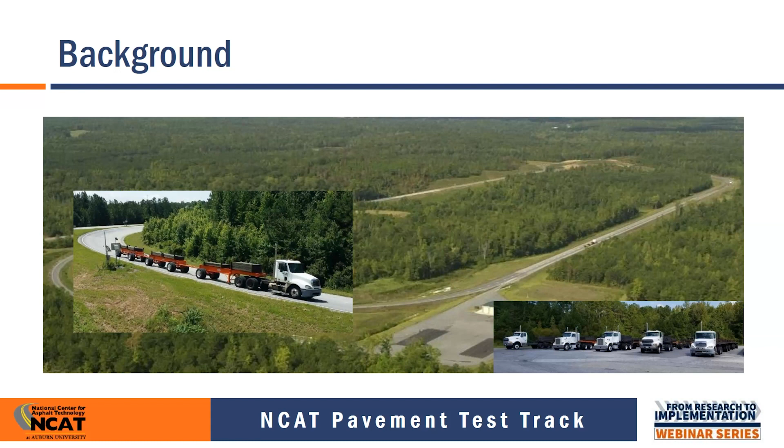We run 5 trucks at a time to do this. What this means is that when we're optimally productive, we want to do 100,000 ESALs per week, or 20,000 ESALs per work day, and then we shut down 1 day a week so we can go out on the track and do detailed pavement condition assessments.

With respect to today's topic, I wanted to go through the history of the track and pull out some very specific information before I hand it off to Ben. Today's format is going to be a little different because I'm going to go through the background and then step off into the research and cover the very first part of that, and then hand off to Ben.

When we finished the first track, it was almost exclusively virgin mixes all the way around. All 46 of the original 200-foot test sections were all but just a couple - there were a couple of low RAP mixes, but everything else was hot, virtually everything was virgin.

In the first rebuild in 2003, we had some low RAP mixes in mill and inlays, and we did our first warm mix asphalt - some of the first warm mix asphalt in the United States, in fact, was on that 2003 track.

In 2006, we did our first mixes I would classify as high RAP. They were 45% RAP, mill and inlay test sections in the curves - the west curve and the east curve. That project was very successful.

From there, in 2009, as part of a bigger structural experiment, we did full depth high RAP test sections where we had 3 layers - the base layer, the binder layer, and the surface layer - all 50% RAP. In 2006 and 2009, we fractionated our RAP in order to hit our quality targets with those mixes.

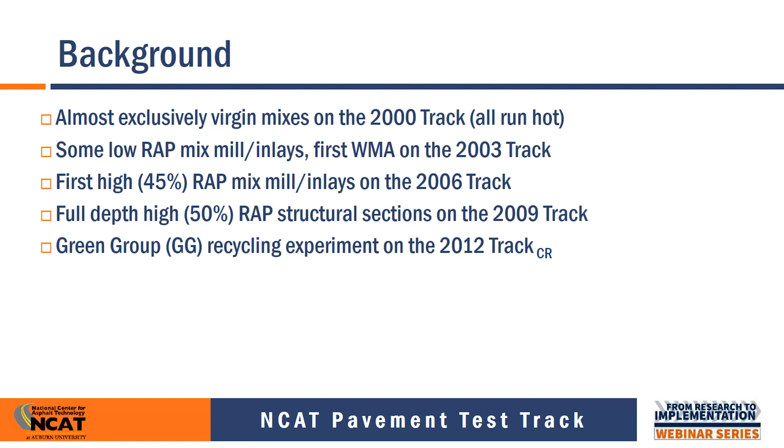I've got that little CR abbreviation there to remind me that in 2012, that was when we did our first 100% RAP cold recycle mix, which Ben is going to talk about quite a bit when I hand off to him. In 2015 and 2018, we executed what we call the cracking group experiment. By the way, in each of these research cycles there were a lot of other things we studied - I'm just referring to what's relevant for today's topic.

Also in 2015, I've got CR in orange there to remind me to tell y'all that we ran cold recycle mix in our hot plant with the burner off after it had been allowed to cool down overnight. So that was another round of cold recycle mix that we did there.

In 2021, the centerpiece of that study was the additive group experiment. In the cracking group study, we got a lot of confidence in the ability of balanced mix design cracking index tests to match the performances we observed on the track. So we moved that forward into the additive group. The purpose there is to look at recycled ground tire rubber and recycled plastic in both wet and dry packages, and also high strength aramid fibers, compared to a control mix. So we understood the cracking test from 2015 and 2018, and then moved that forward to better our understanding of the impact of additives on the life of the pavements.

As you can see here, we've got a history of going from virgin mixes to low RAP mixes to high RAP mixes, in hot mix and warm mix, and then to cold recycle. We've even done coarse fractionated RAP chip seals now several times on the track. I've got fine fractionated RAP microsurface shown there in orange, to remind me to tell you we've not done that yet on the track, but it's not because we haven't wanted to try it. It's just because we haven't gotten the chance to do it yet in a funded experiment.

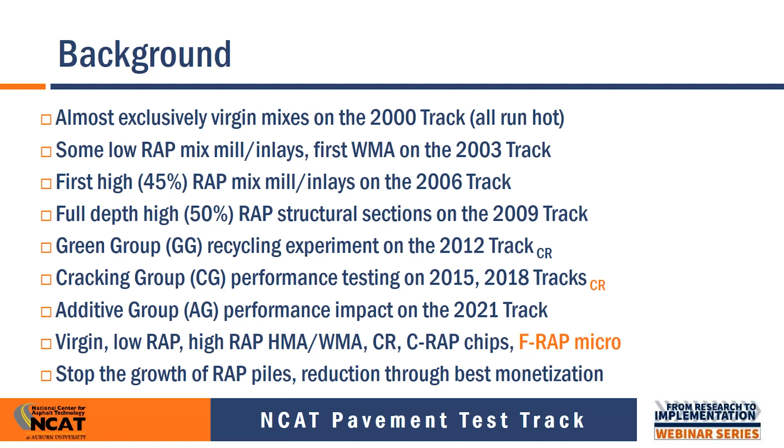The whole point of this webinar, as part of the background, is that what we really want to do is stop the growth of especially the giant RAP piles in some of the urban areas. And then we want to begin to make them smaller through the best monetization of the RAP that is in those existing large RAP piles. Hopefully by the end of the hour, you'll have a good feel for what our philosophy is on that.

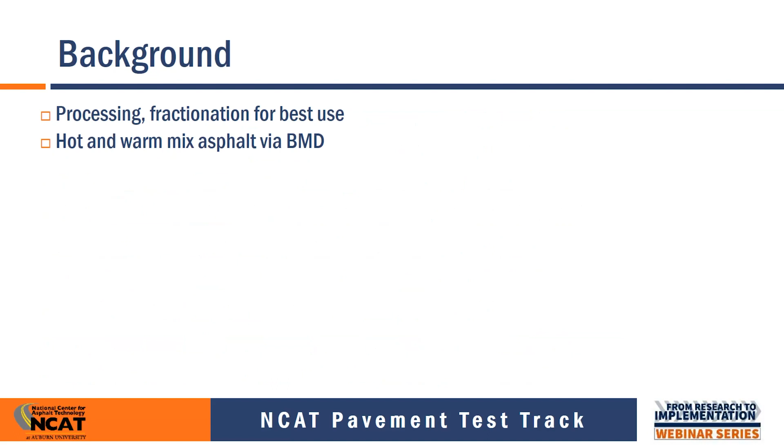So of course we believe processing and fractionation is essential if you really want to get the best use of the material, and I think you'll see that theme throughout the webinar today. You can run hot and warm mix asphalt using RAP when you use balanced mix design practices.

When you're running BMD tests, really simple BMD tests with this type of machine, you load these samples in indirect tension. When you run the sample at some elevated temperature, run it hot, the peak value gives you a strength indication that we believe correlates well to a loaded wheel tester. And then when you run it cool at laboratory temperatures, the shape of the curve correlates well with the cracking that we've observed on the track.

So you use these tools to design virgin mixes, and volumetrics served us well for a long time with virgin mixes. Nathan Moore and I talk about this all the time - volumetrics are a great tool for developing mix designs, but they have less value for actually policing mix designs.

But when you get into low RAP mixes and especially high RAP mixes, you need to use best practices on your yard to do processing and fractionation, and you really need to respect RAP piles more than virgin piles in terms of your quality program on your yard if you want to run higher RAP contents. And when you're running high RAP, that's when you might want to consider additives like recycling agents for short-term and long-term aging, that type of thing.

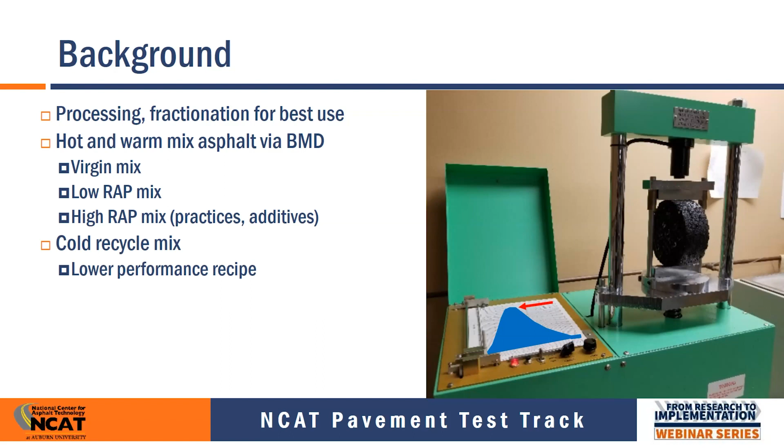Cold recycle mix is another great use for reclaimed asphalt pavement, and I like to think there are three different ways that we can use it. You can use it for lower performance, just using a recipe, using conventional values for binder contents and cement contents and that type of thing. And then kind of the conventional way is to have a medium performance mix with a mix design, and Dr...

I've already mentioned that we've done coarse fractionated RAP chip seals on the track, and at some point we want to do a fine fractionated RAP microsurface. This is a process used by some agencies out west, even doing cape seals that are 100% RAP, where you use the coarse fraction for the chips and the fine fraction for the microsurface or slurry seal overlay riding surface.

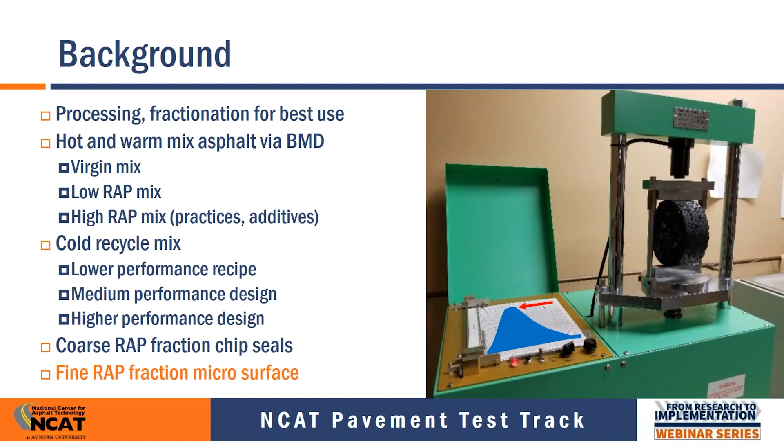So I want to go back to the Green Group experiment from the 2012 track. I mentioned this in a previous slide, but there's a lot of really good stuff in this experiment. What I want to stress here is that Dr. Randy West was the principal investigator on this project, and we used perpetual pavement principles to put these test sections together.

So there were 4 test sections in this study, and the control section was section 5 on the north tangent—kind of the all-American build up, 6 inches thick, 20% RAP surface, and then 35% RAP in the intermediate layer, or the binder layer, and the base layer.

And then we had these 3 treatment test sections. Section 5 on the south tangent was high RAP. Section 6 on the south tangent was RAP and RAS, post-consumer RAS. And section 13 on the south tangent was recycled ground tire rubber.

When I say we used perpetual pavement principles, the idea was: let's put something that we think is going to be crack resistant on the bottom, where deep and expensive cracking initiates as a result of higher strain levels at the bottom of the asphalt, the lowest layer. Put something that's stiff in the middle to reduce the bending, deflections, and strains at the bottom of the pavement. And then put something that's durable, rut resistant, and renewable on the surface.

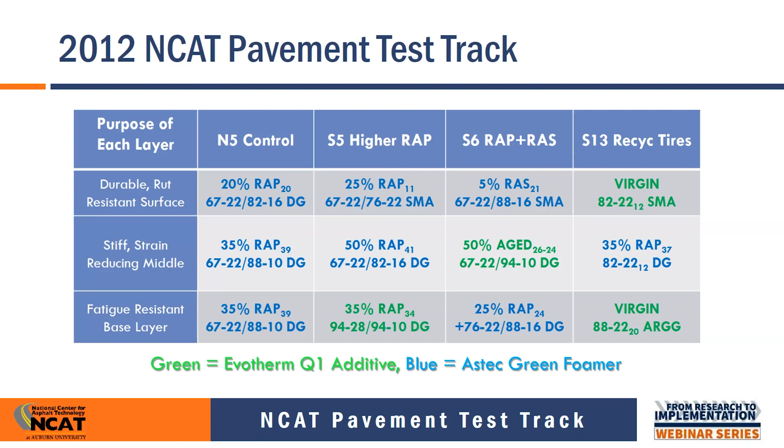That was the philosophy of this study. We were not trying to build perpetual pavements, but we were using perpetual pavement philosophy and practices to put together these test sections.

So as you can see here, where I've highlighted that lower layer, we used highly polymer modified binder in S5. We used lower RAP and a rich binder, elevated binder content, in S6. And then we used virgin material in an asphalt rubber gap graded mix in S13.

So for that lower layer, where you're trying to prevent deep cracking, you use a crack resistant hot mix asphalt, or you can maybe even use one of those lower performance cold recycle mixes that I talked about earlier. That lower layer typically in a perpetual pavement is 2 to 3 inches, but we're not building a perpetual pavement—we're just using the design philosophies here.

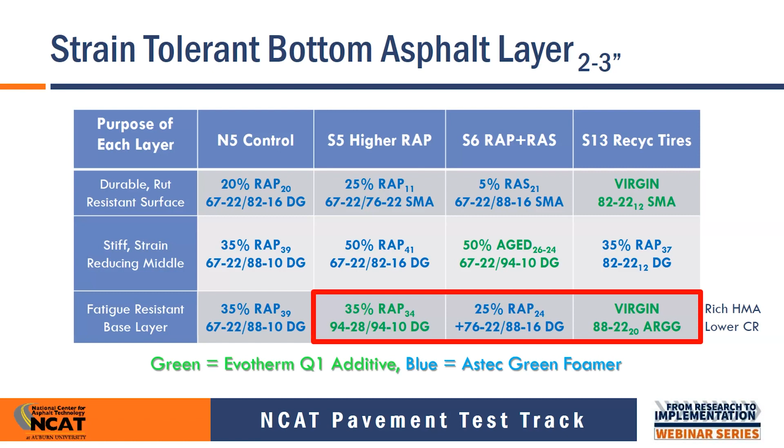The intermediate layer, in all 3 of these cases, was a stiffer layer. We used RAP and RAP in S5, RAP and RAS in S6, and recycled ground tire rubber in S13, to reduce deflections in the structure. So in that intermediate layer, where you want it to be stiffer and strain-reducing, deflection-reducing, you can increase the RAP content in hot mix asphalt, or you can put a moderate performance type of cold recycle layer in the middle, which we have done out on US 280.

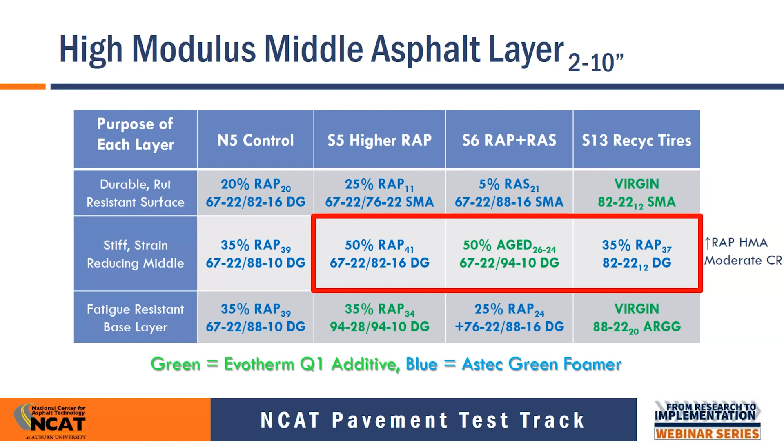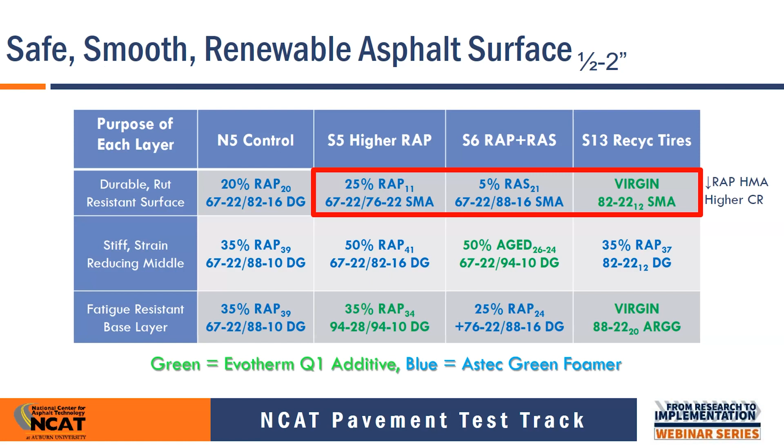And then for these surfaces, which can be anything between a half inch thick and 2 inches thick at the extremes, you want something that's safe, smooth, and renewable. Typically you should look at something with a lower percentage of reclaimed asphalt pavement, unless you're using things like recycling agents to improve the health of the binder. We're even doing research now at NCAT to use high performance cold recycle mixes possibly as surfaces on lower volume roads, like for cities and counties.

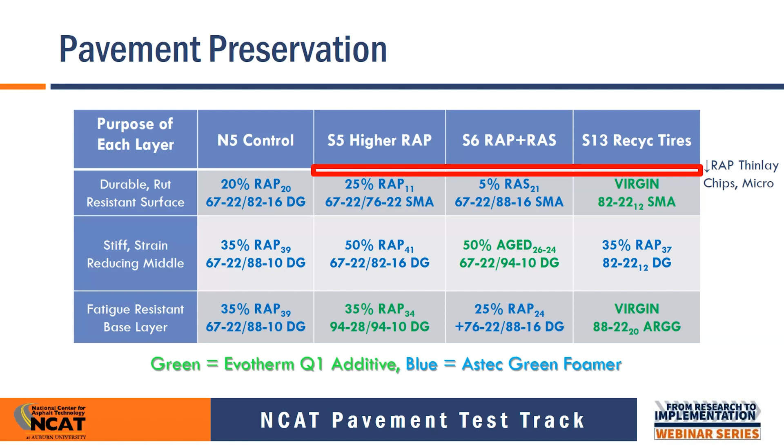And then, once you've got that structure, you can focus on pavement preservation. This isn't necessarily a thicker pavement, since we're not promoting that type of thing in this webinar. But then you can come back with preservation and maybe use a low RAP to no RAP thin layer, highly crack resistant thin layer, or you can use coarse fractionated RAP for a chip seal, or fine fractionated RAP for a microsurface, and take care of the pavement preservation needs on that pavement structure.

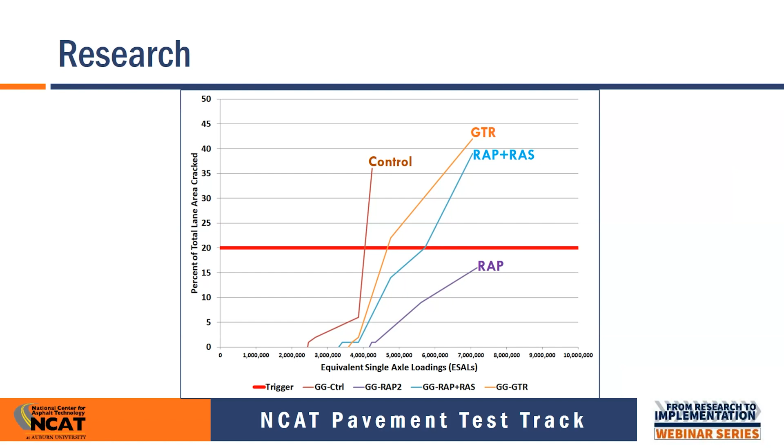And I am going to talk about kind of a different perspective and highlight more on that cold recycling and also some other uses of RAP that I've seen that have been particularly impressive, despite maybe how I thought they would perform. So why don't we start there, right?

So what are some uses of RAP to get rid of some of these large stockpiles, but not use them as simply fill material and, God forbid, landfill? Like, we don't want to be doing that. And I remember from my time in Virginia, there was an idea that was proposed that, I'll be honest, I told the person who proposed this, I thought it was kind of crazy and maybe a waste of time. And that was actually using RAP on unpaved roads.

What was proposed here, one of the issues they were having on some of these secondary gravel roads was dealing with winter maintenance issues, and after major precipitation events, they'd deal with washout. It was costing the DOT a ton of money to get out there and regrade those roads. So what they thought about doing was, well, because we can't afford to actually pave this road, and there's a lot of political things, board of supervisor approval, things like that, to actually pave a road and maintain it, they looked at: what if we took RAP, which still has that asphalt binder on it that we can actually meld back together, and use it as a gravel road that will be a higher performing gravel road?

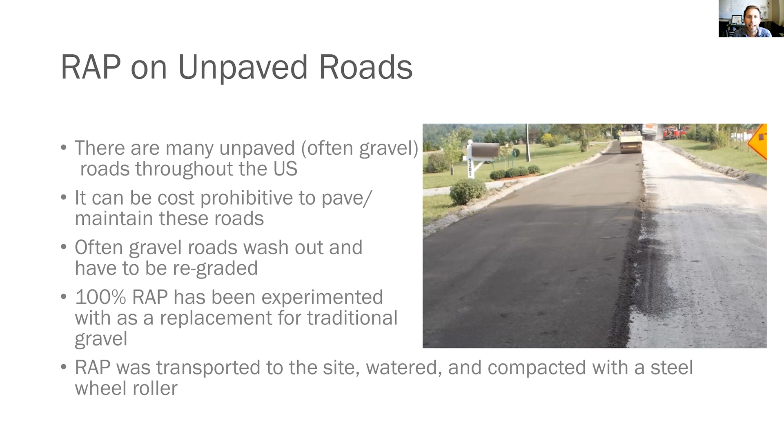So what they did was they took 100% RAP. They added water. For those of you who don't realize, you can run an AASHTO T180 Proctor on RAP and you'll get an optimal moisture content for RAP. So they added water, and then they placed this RAP out on top of this gravel road, as you see here, of course after grading it. Then they compacted it with a steel wheel roller, and they created, interestingly, a final product that looked a whole lot like a really old road. So you see that picture here on the right. Now, what's important is that the RAP binder actually causes those aggregates to stick back together.

Even though it's stiff and oxidized, what was really cool is that locals were really pleased to have their road paved—which they had not had paved, but they thought they did. So there's kind of a social benefit here, but ultimately it ended up saving money. The reason is because when they started dealing with major rain events and things like that, that RAP binder was actually sticking the aggregates together still, so they weren't dealing with as much washout and issues like that—none of the major rutting and things we experience in major precipitation events.

So this is a positive effect for these folks, and it's a way to also make our pavement leverage this asphalt that we already have. Do I think this is the top way that we should be using RAP? Well, no, but the fact of the matter is, most of our infrastructure is built, and right now we're trying to increase our RAP contents, but we're not at 100% RAP. So we have more RAP stockpiled than we actually have time to use, or places to use. So how can we actually move forward and use this in a beneficial way and continue to use it as a pavement? I think that's a really important takeaway.

So I wanted to highlight that because I thought it was kind of a cool example of something that was done that was a little bit outside the box, that again, at the time I thought was kind of crazy, but it actually worked and folks were actually pretty satisfied with it.

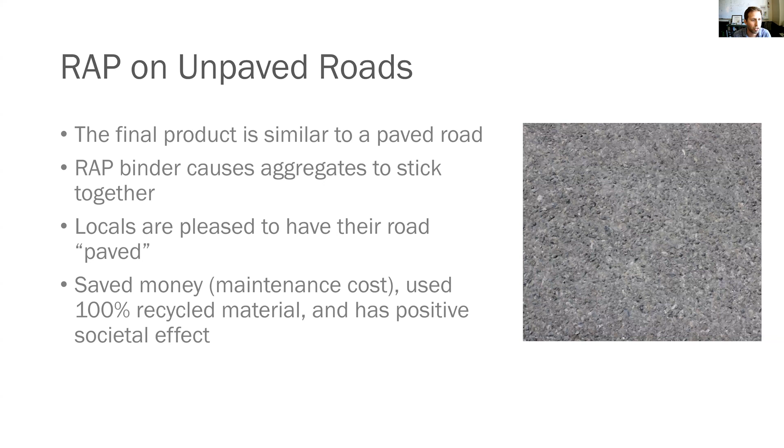So kind of stepping now into a little more of a designed mixture, a direct application to not only our low, but our medium and high volume pavements, I'm going to talk about cold recycling. Travis actually talked about the work we did when I was in Virginia. I continue to work with those folks, both on the test track, as well as on some other projects focused on cold recycling and ways to better understand cold recycling technology and techniques, and ways to enhance its use so that we can be using it in more applications.

So as a reminder, for those of you who aren't familiar with cold recycling or don't remember it, cold recycling consists of two methods. Basically, we're going to use 100% RAP, and we're going to do it either in place, which is called in-place recycling, or we're going to use the material pulled out of the road or stockpiled in cold central plant recycling. You produce the exact same mix, but one uses a mobile plant, the other is done actually on site.

Now, it's a combination of RAP and water, which throws all my hot mix folks off because we don't like water in our hot mix asphalt. But again, it helps us to get a maximum density. You get 2 to 2.5% binder, either in the form of a foam or an emulsion. And sometimes we'll have 1% of an active filler, something like cement or lime. That's really to add fines and enhance some of the early strength gain. And this whole process is done cold, so we're not adding any heat.

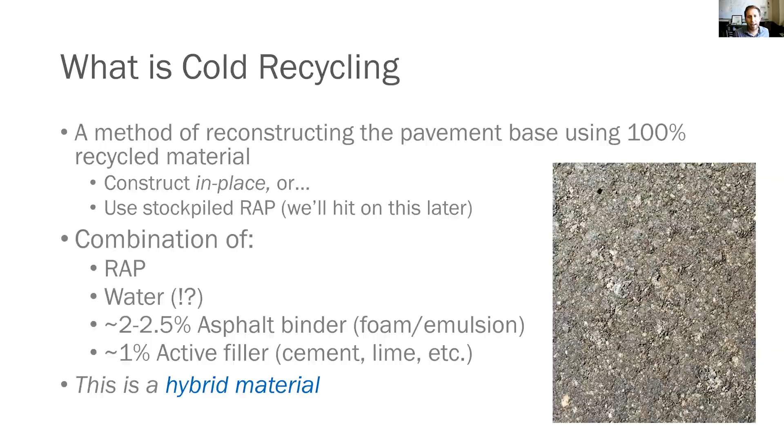So keep in mind, cold recycling is only in the bound layer. It's 100% RAP. We're not getting into that aggregate base or the subgrade. That would move us into a full depth reclamation process. And with CIR, we're typically 2 to 5, maybe 2 to 6 inches thick. There are some newer recyclers that can go much deeper than that.

Excuse me, we can't see the slides. You can't see the slides? All we see is the first slide. Oh, weird. Okay, hold on. Let me try this again. I can see him just fine. Now we see them. We back? All right, thank you. I see now a bunch of chat showed up here, so sorry about that. Let me know if you have any other issues. Thanks.

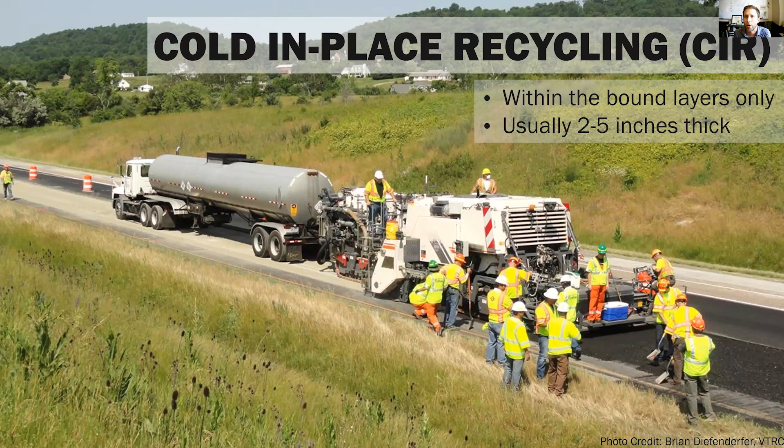All right, so this is our recycling train. This is a single unit recycler. There are multi-unit recycling trains. I don't have time to get into all of that, but I can point you to some helpful resources like the Basic Asphalt Recycling Manual by ARRA that can show you all that, or you could reach out to me afterwards and we can have more conversations.

Hopefully you see my slide change.

We're still having slide sharing issues, it sounds like. Stacy, can you see this? My slide change? Yeah, I can see it fine. Okay. Yeah, I see it changing as well, Ben. Okay. So maybe there's some lag issues that happen in COVID Zoom world.

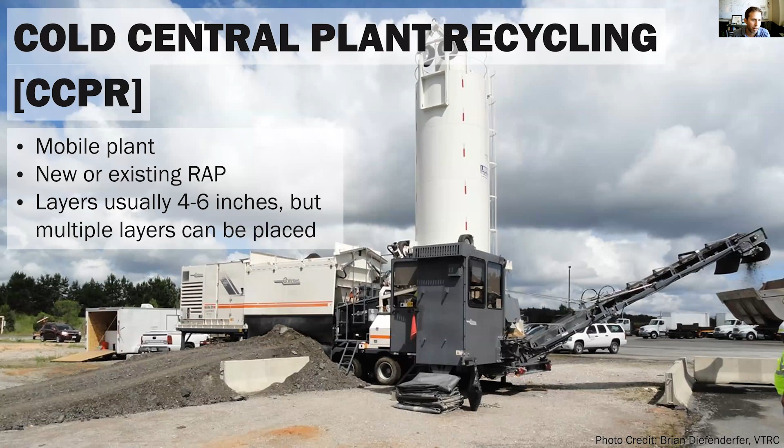All right, so we could use new or existing RAP. Typically, again, that 4 to 6 inches, but we could also place it in multiple lifts. So you could have multiple 5 or 6 inch lifts put down with this material. You simply load it, in this case, into a front end loader or into the back of a dump truck and haul it out and place it using a typical paving screed.

So let's talk a little bit about the research that's been done down here. Buzz alluded to it earlier. In 2012, NCAT was getting ready to do a new test cycle, and VDOT wanted to experiment with what they did on the I-81 project. So they brought all their materials down here and built 3 test sections. 2 of them had 5 inches of CCPR, one with a 4-inch asphalt overlay, the other with a 6-inch asphalt overlay. And the third one had 8 inches of cement stabilized material with 5 inches of CCPR and 4 inches of asphalt on top.

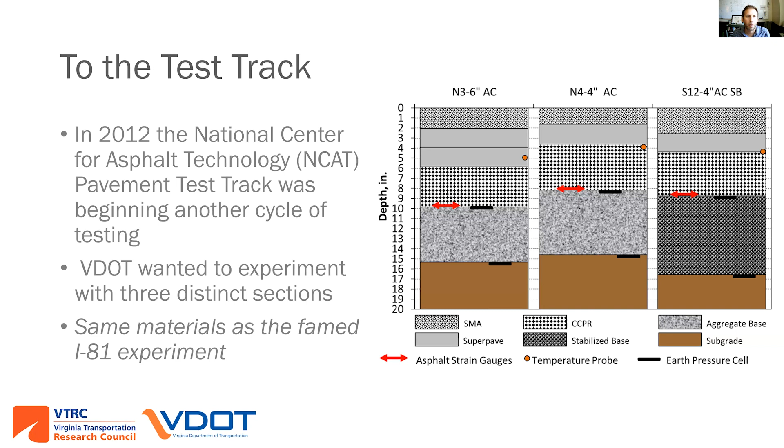Now, what's really interesting is that we didn't think this was going to last more than one track cycle. After 3 track cycles, so 30 million ESALs, the section that had the stabilized base under the CCPR, using an FDR process, actually performed, according to our experience with perpetual pavements and measuring tensile microstrain, which is some of the work Dave Timm has done, as a perpetual or long life pavement.

So we do believe that the section with the CCPR over the FDR base is a perpetual section. We actually took that offline. And the section that had the 4-inch overlay over 5 inches of CCPR with no stabilized base, over aggregate base, was not deemed to be perpetual because we've started to get some cracking. But it did go basically 30 million equivalent single axle loads before we got any cracking, and we've continued. So in the future, we'll have an update on how that's going.

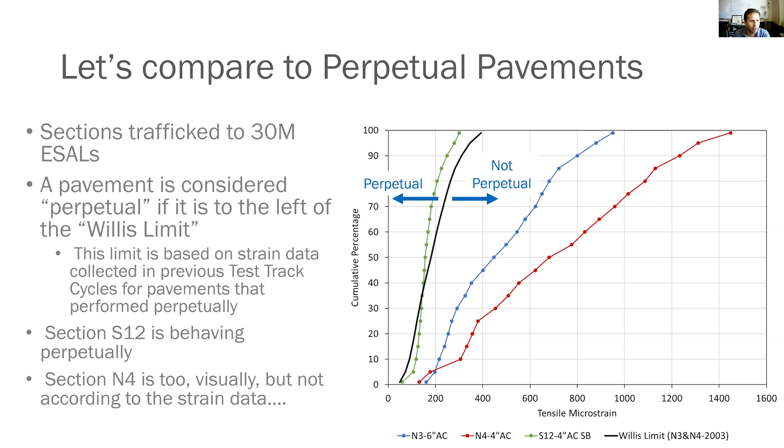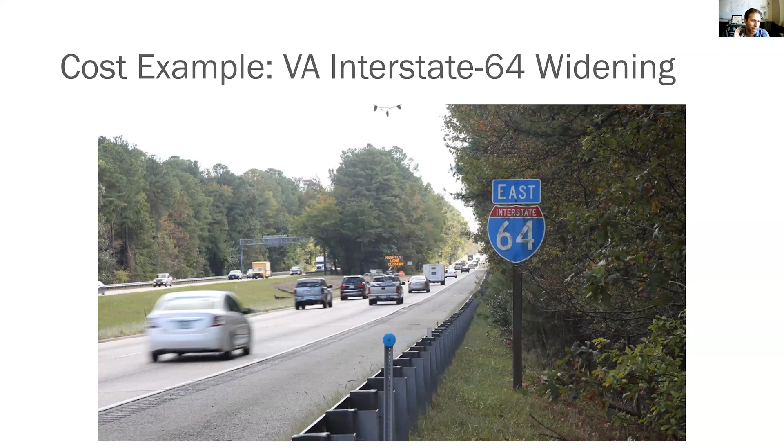So let's talk real quickly about how we use this. What's the implementation outcome? When I was at VTRC, we found out about a project to widen Interstate 64, basically from Richmond headed out towards the beach, going through Colonial Williamsburg. They wanted to widen it and either rehabilitate or replace the existing concrete pavement. So Brian and I drove down to Richmond, showed them all this data from NCAT, provided some numbers, and said, would you consider implementing this cold recycling and FDR approach that gave us a perpetual pavement?

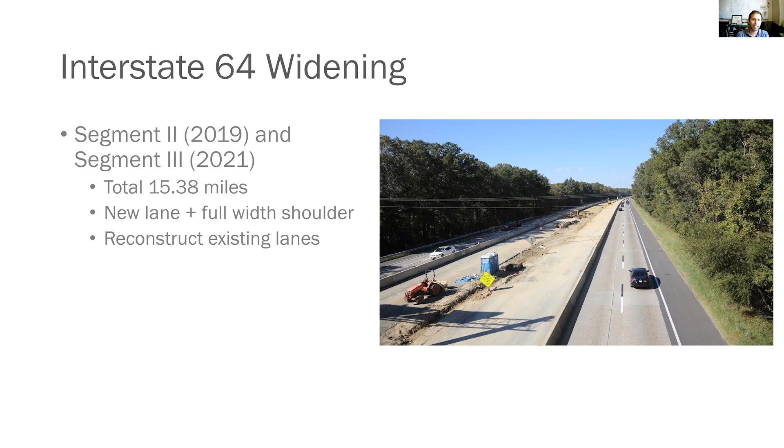And the good news is it was a design, not a design build. It was a special project. So they put out a concrete option, an asphalt option, and a recycling option. The recycling option actually won the bid. So 15.38 total miles. It's a new lane to the inside plus a full width shoulder in both directions, and then reconstructing the existing lanes. In the recycled design, we have 4 inches of SMA over 6 inches of CCPR. There is a 2-inch open graded drainage layer between the CCPR and then a 12-inch FDR.

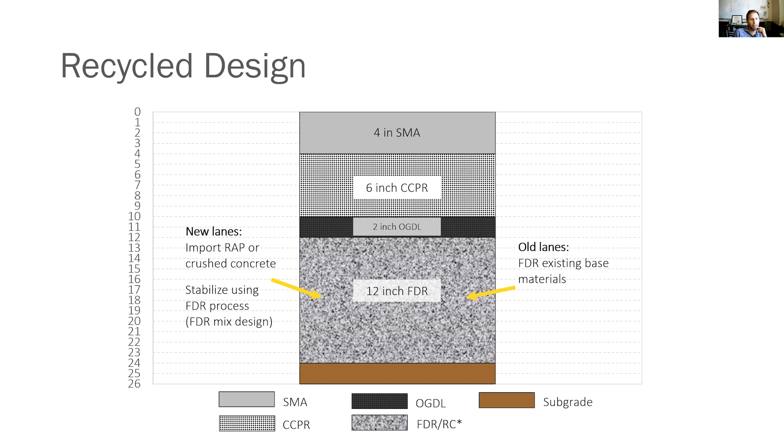So this very closely mirrors what we used down at the NCAT test track and saw great performance with, as well as what they did on Interstate 81 in Virginia and have had excellent performance with. So what I like to highlight is the way this was implemented actually helps to minimize traffic impacts as well as enhance safety. So this is our existing concrete lanes.

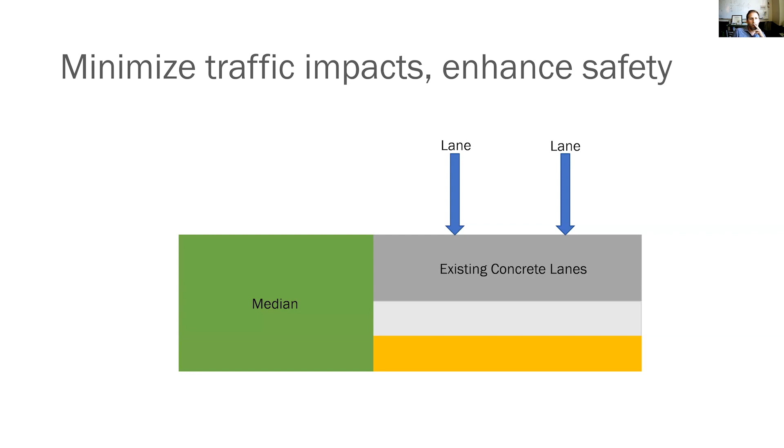You have 2 lanes along with a median. They put up a safety barrier, and then they constructed the new cross section. So this recycled cross section. Now, you might be thinking, how on earth did you do full depth reclamation when you were in the median? What they did was they actually brought in a combination of RAP or recycled concrete aggregate, basically graded everything, laid it out, and then ran the reclaimer over it and basically imported the FDR. So we've been referring to this as imported FDR, placed the CCPR, and then the asphalt surface.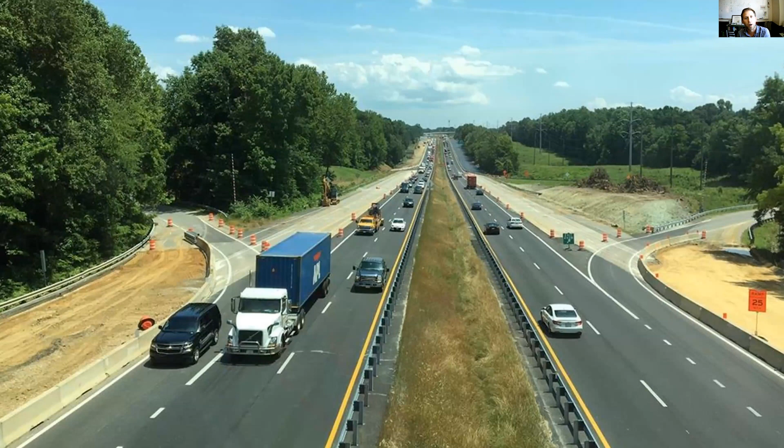So a couple of important takeaways here is total cost savings are estimated between 10 and $15 million for this project combined. Some calculations were done and it looks like we're saving energy roughly 25 to 45% compared to traditional alternatives, as well as 15 to 40% in terms of our greenhouse gases. So thinking about everything we know about life cycle assessment and EPDs and things like that, a real benefit here.

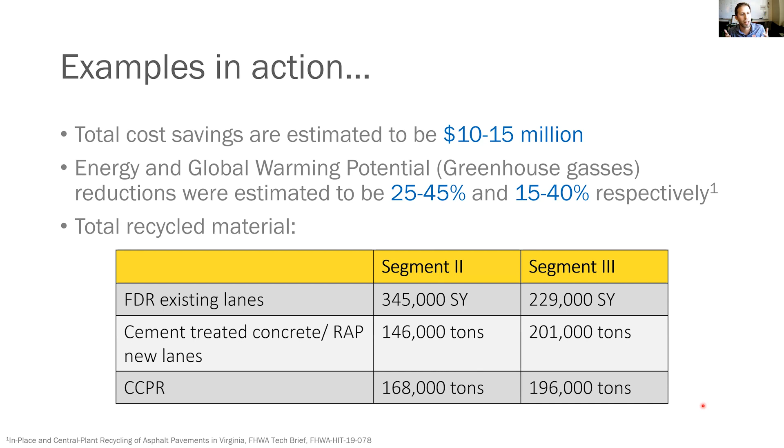And then finally, looking at the amount of material that was used, and I really want to focus here on the CCPR here at the bottom. This used over 350,000 tons worth of RAP. That is a lot of RAP that was able to be used as a high-performing, high-traffic interstate pavement. And so this just shows a good example of how we can be using 100% of our RAP and incorporating it back in. Now, keep in mind, this was new lanes and an old concrete pavement. So it's not like we generated a bunch of RAP in the process. So thinking about some of these applications for lane additions, shoulder additions, and reconstructing existing pavements can be really beneficial.

Brian put together a cost comparison to what was going to be the traditional HMA. So the HMA design called for 12 inches of asphalt concrete over a 2-inch open graded layer, over 8 inches of cement treated aggregate. In both cases, the structural number was within 0.02 using VDOT structural layer coefficients. However, the difference in cost was $83 for the traditional asphalt approach versus between $40 and $61 per square yard for the recycled approach. And you might ask, what's the difference?

It was higher. So the 61 reflects actually having to import that FDR. So actually having to truck in the RAP and things like that that were used to make the new lane. But in the outside lanes, they didn't have to do that.

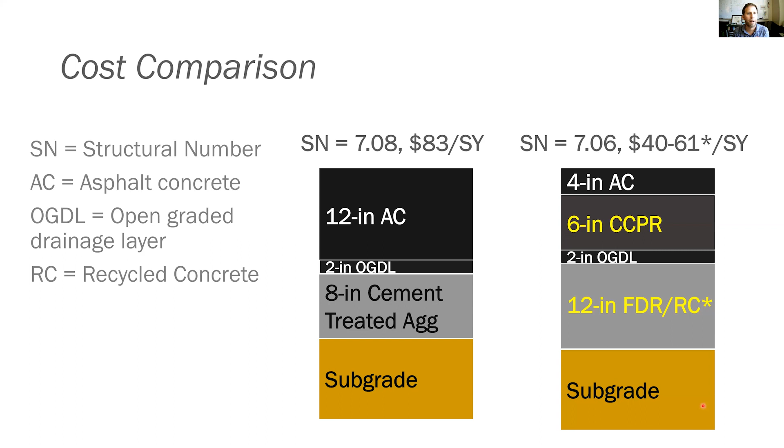So the last thing I want to hit on real quickly is some work we're doing. And you heard Buzz talk about high performance cold recycling. We reconstructed our off-ramp during the last test track cycle. Basically, what we were interested in is what happens if we add a rejuvenator to CCPR. We've been getting that question a lot. And based on the experience we have, we knew it would be somewhere between hot mix asphalt and traditional CCPR.

So what we did was we put down 4 inches of hot mix, 4 inches of foam CCPR, which is quote unquote traditional, 4 inches of an engineered emulsion CCPR. And then we had 3 sections, each with different styles of rejuvenators. One was an emulsified bio-based rejuvenator. One was a straight rejuvenator with no emulsion. And then one was an emulsion where we added in a rejuvenator.

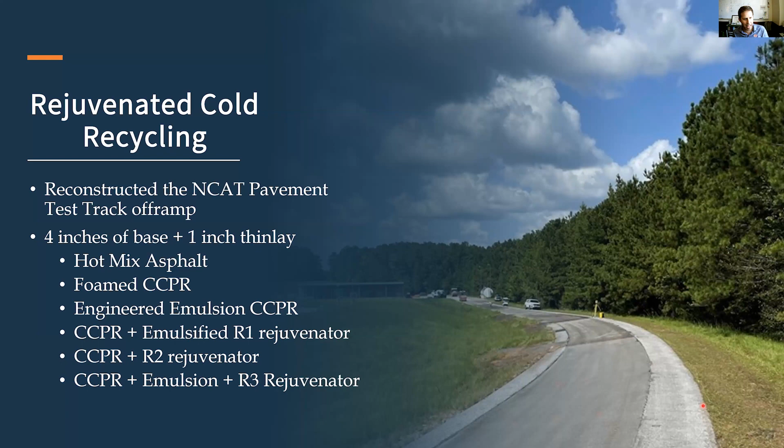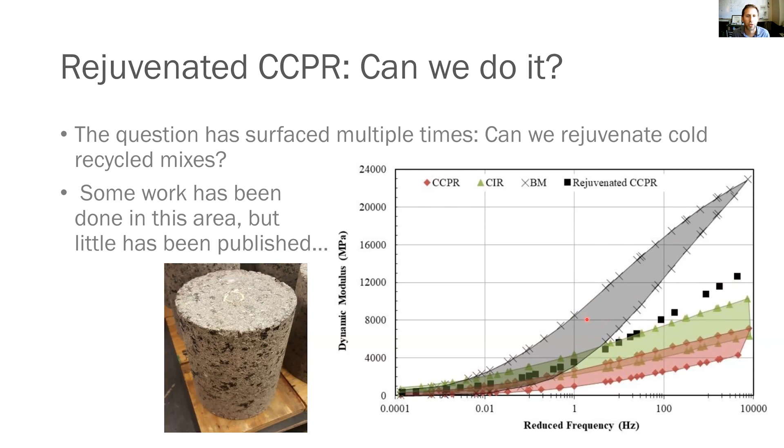So we thought, well, that's interesting. Is that a good thing or a bad thing? We don't know. So we wanted to experiment with it. So we brought in two different plants. One was the Wirtgen cold recycling KMA. Another was just a portable pug mill that was brought in.

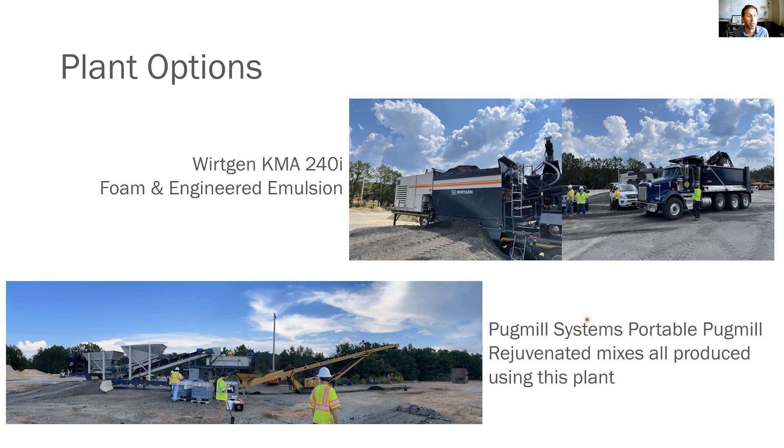And the traditional or typical cold recycled mixes used the KMA, whereas the rejuvenated mixes, the folks who brought those rejuvenators down elected to use the portable pug mill. They do basically the same thing. So there was no concern about getting major differences between them, but it did show some different applications and thinking about where we might do this.

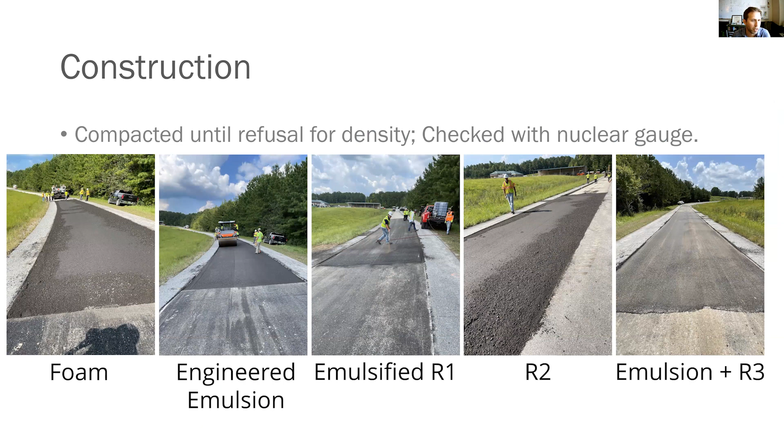Construction pictures: basically we constructed this just like hot mix with the exception that we compacted till refusal and it wasn't hot. Our densities were much lower for this material compared to hot mix as well. So we were hanging out in like the 130 pounds per cubic foot or high 120s pounds per cubic foot instead of up in like the 140s.

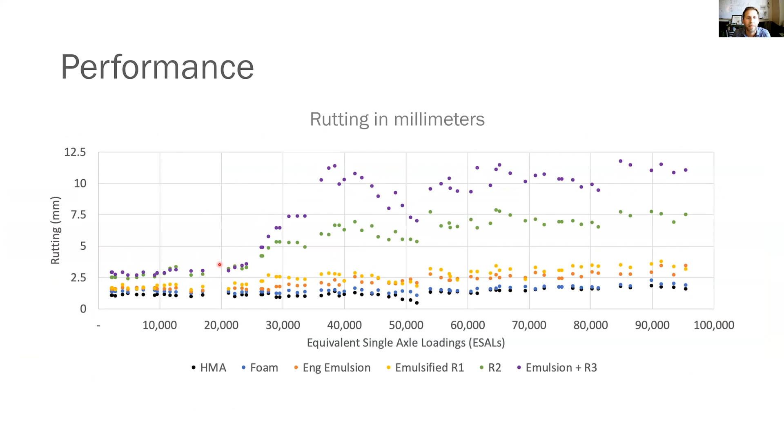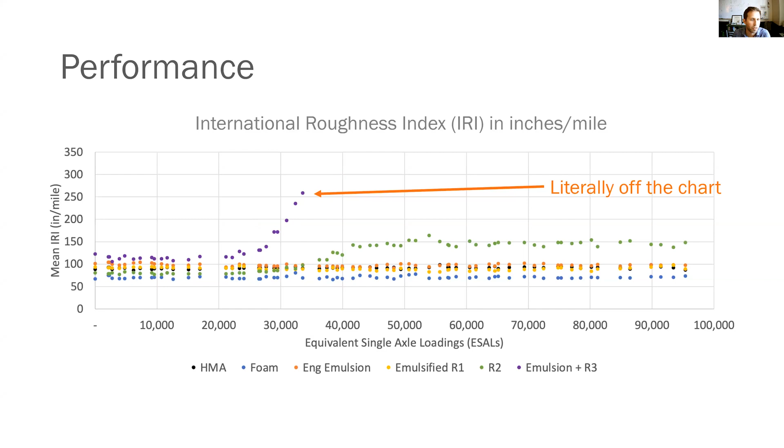Now, why is that? We believe that it had to do with the emulsion type that we used, as well as excess moisture in the mat and needing longer to cure. We know how we're going to correct this moving forward. And so if we end up doing significant maintenance or rehab here, we're going to shift gears a little bit, because what we've seen is that the other sections with rejuvenator are performing just fine.

So we don't think this is a "you shouldn't use rejuvenator," but this was new territory. It had never been done. And so we were really, in a lot of ways, experimenting in mix design and then taking that to the field. So some helpful lessons were learned, and we'll continue to update you all as we round this out.

Okay, great. So to follow up with Ben, to piggyback on this, I guess it was a couple of years ago that you guys were doing a presentation about this similar thing, and I had just mentioned that we had done some of this in Texas, and so we've done a couple of these together since. So I'll jump right into it because I don't think we have a ton of time.

To give you a background, I worked for a large family-owned asphalt producer here in Texas several years ago; they sold in 2021. And at the time of the sale, we had almost 2 million tons of RAP in inventory. And we have several challenges that we face here in Texas. One is that the TxDOT specifications have kind of gone backwards on RAP usage. Everybody's concerned about sustainability and decarbonization, and everything's moving in that direction, but our specifications in Texas are not following that necessarily. And so for a lot of surface mixes, several districts by general note will not allow RAP.

And so what happens is we have a 50,000 ton mill and overlay job. We just put 50,000 tons of RAP in our inventory. And Ben's already covered some of the benefits of using RAP.

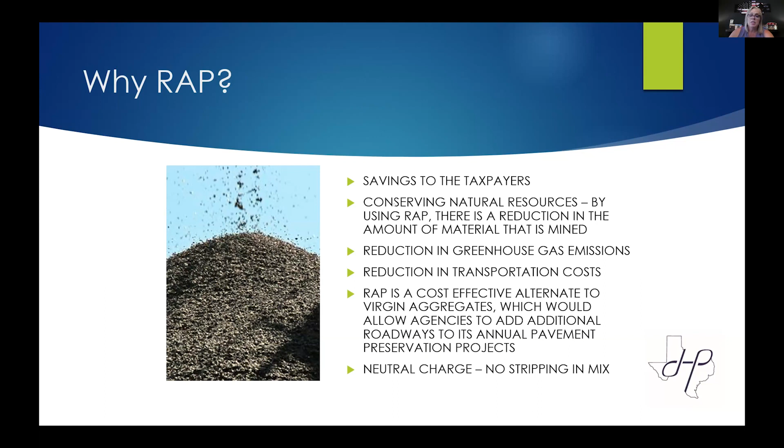I'm just going to talk specifically about why we got into some of the things we tried here in Texas. One was, hey, what can we do with all of this RAP? I've already talked about why we looked at these options and some of the challenges.

Another challenge we faced, as some of you may be aware, was early last year the Vulcan quarry in the Yucatan was basically seized by the Mexican government. That took about 8 million tons of aggregate out of the Texas market overnight, gone, 8 million tons a year. That particular burden fell on Texas quarries already operating at capacity. Then rail is a challenge, everything's a challenge. So we're going to have to be more creative.

We're going to have to look around at the materials and inventories we have. I already talked about the problem with specifications and how we've been greatly limited, coming back around with more balanced mix design studies. But we're still very challenged. So several years ago my bosses came to me and said, 'Hey Stace, is there something we can do with all this RAP?' And I said, a hundred percent, we absolutely could.

Years ago I had done a lot of work with the emulsion industry here in Texas on full depth recycling, on cold in place recycling, and several other processes that had kind of fallen off a little bit. So I reached out to some of my friends at Ergon, and we talked about what our options might be, and came up with the idea of doing cold central plant recycling.

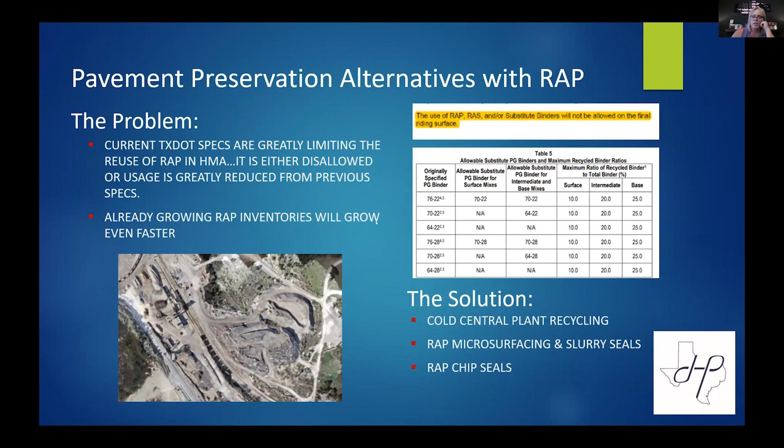Years ago we did some cold in place recycling in Texas, but that kind of went away, like I said. So we took an old cold in place recycling spec and modified it to be more of a cold central plant recycling spec.

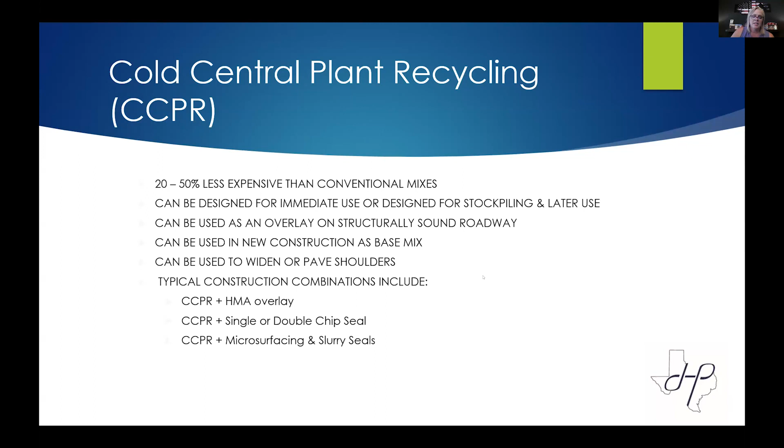So this is just where we were with the options. Ben's already covered where these things can be used. In late 2018, with the help of Ergon and then Paragon, their technical service group in Mississippi, they took our RAP and we came up with a list of options: cold central plant recycling, using it for chip seals, using it in microsurfacing.

Mostly I'm just going to talk about the cold central plant recycling. So we did a design with 100% RAP. The idea was, could we come up with something like our hot mix cold lay spec, which is like a cold patch material. It's mixed hot, but it can be stockpiled for up to 6 months and used.

It's a maintenance mix, so we thought, could we do this for some of our county guys? Could we get a special spec with TxDOT? Interestingly, this maintenance material doesn't allow any RAP. It's very interesting that this is a maintenance mix, and the TxDOT spec does not currently allow any RAP in their cold mix. So anyway, we wanted to see if we could come up with something that was 100% RAP that we could stockpile and use in a similar fashion.

So we tested it, and modified between the cold central plant spec and some of the hot mix specs, and used the Hamburg wheel rut test, which is not currently in the cold mix specification. We were trying to come up with something in between cold mix, hot mix, and cold in place recycling. So we used an emulsion, about 3% emulsion.

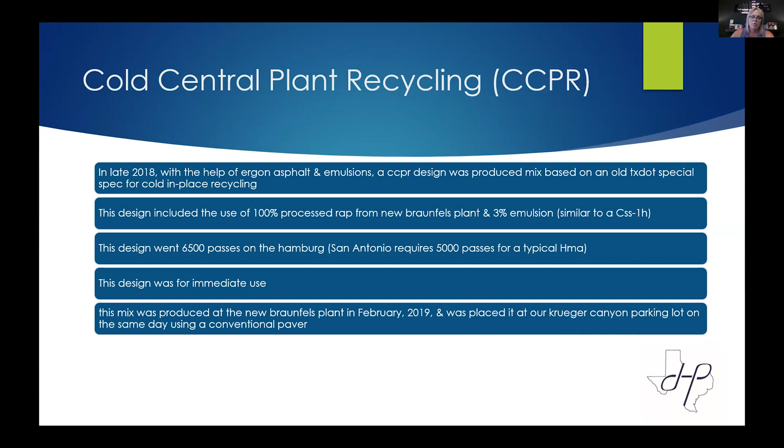And then we placed it with a conventional paver in a parking lot at our main office there. You can see it in the paver, then rolled it, constructed in the same fashion that Ben talked about in his presentation, just built it like it was a conventional hot mix pavement. And it turned out really well.

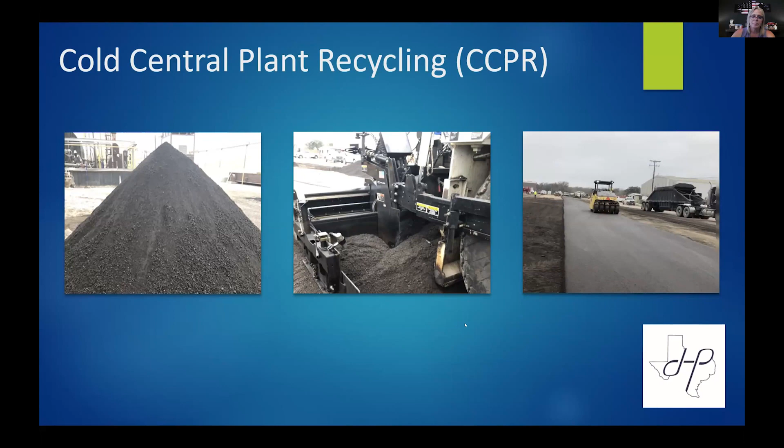We were excited about it, but we wanted to get to where we could maybe stockpile this. So the guys at Ergon went back to work, added a rejuvenator to the emulsion, and that seemed to give us about a 3-day window, not anywhere near the 6 months that was in the current cold mix spec, but to give it a few days, we thought that was interesting.

We also changed up the mix design a little bit, where we did a 95% RAP and 5% manufactured sand with the emulsion with the rejuvenator in it. That material, just by giving it a little more of those fines from the man sand, we actually went over 11,000 passes on the Hamburg. Now, the standard TxDOT spec statewide for hot mix with 64 minus 22 is 10,000 passes on the Hamburg. We got 11,000 passes with a 95% RAP, 5% man sand, and 3% emulsion.

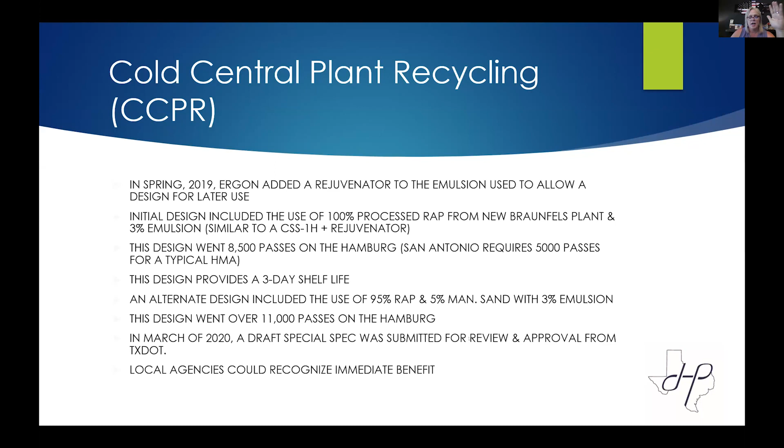We did get a draft special spec done in the Austin district in March of 2020. And then it was March of 2020 and lockdowns happened, COVID's crazy. Everybody's working from home. So the spec just kind of died on the vine. But we did have that in place, we're working in that direction, and it's something that could 100% be revisited. But there was a lot of potential, a lot of people were excited about it. We had a couple of counties very interested in using the product on their county roads. They saw the benefit, and we saw it was most likely easier to get in with local agencies and get this going than it would be with TxDOT. But again, COVID kind of just put a damper on a whole lot of things for everybody.

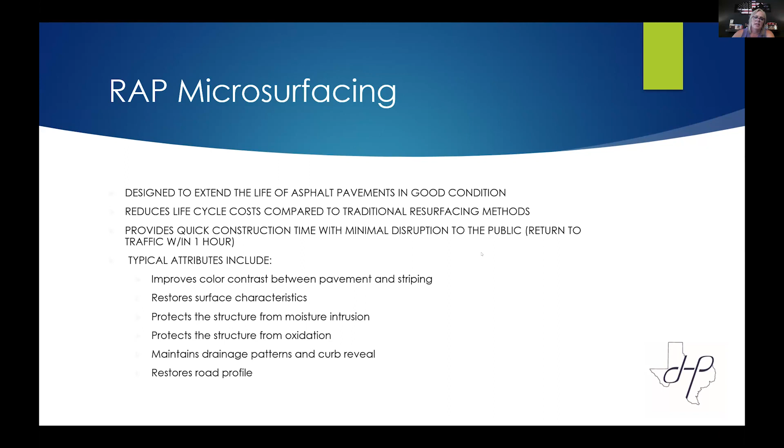Another thing that Ergon looked at was the use of the material in microsurfacing. We teamed up with Ergon, the city of Baytown, and Intermountain Slurry Seal, and put down, in April of '19, 100% RAP microsurfacing on a city of Baytown project.

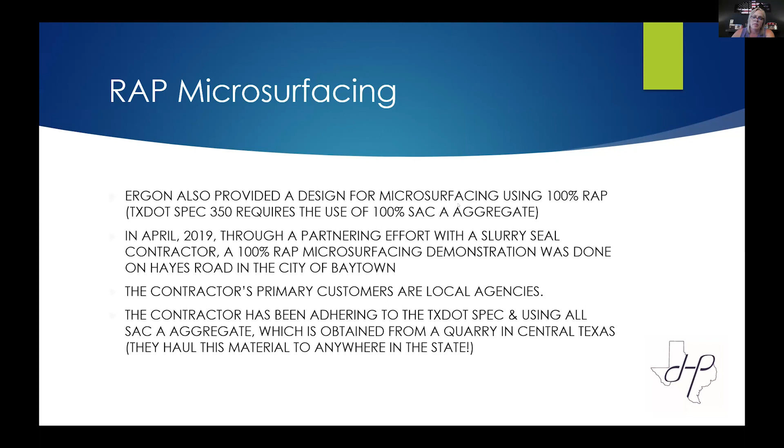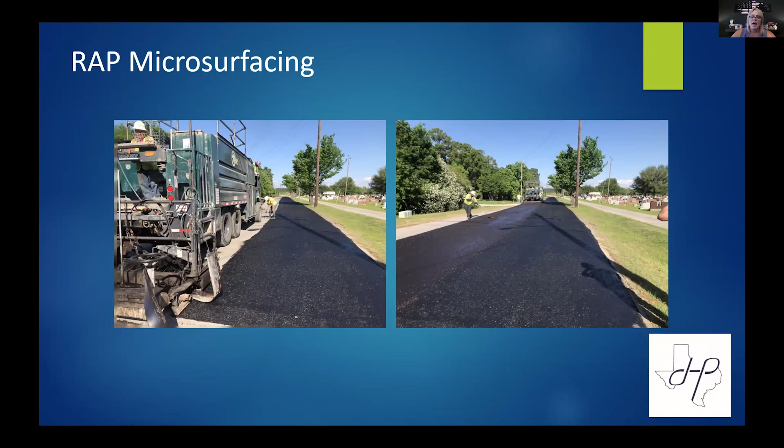There it was, just going down. We did a little test where one side we rolled and the other side we didn't, because in a typical microsurfacing process you wouldn't roll it. So we wanted to see the difference between the two. With the emulsion, it was a little heavier than the typical microsurfacing applications, so we were just seeing how that worked. One lane was rolled, one lane was not.

Today this material is still performing. That was April of '19, so it's been down for a little over 4 years, and it's still doing quite well.

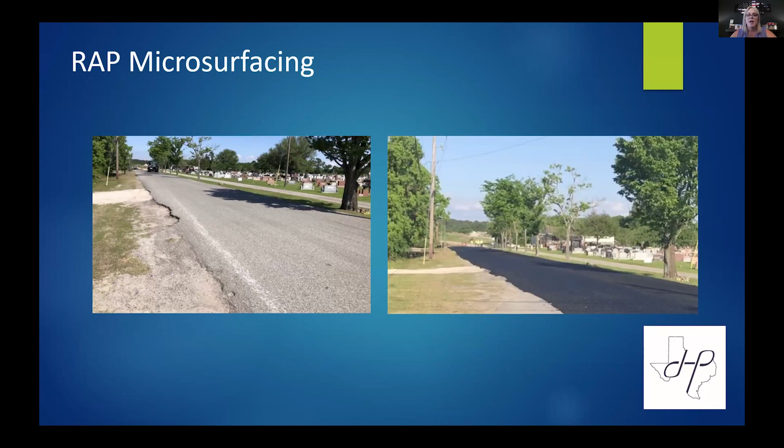The interesting thing about that is the microsurfacing specification in Texas calls for 100% SAC-A aggregate, a 3/8 minus. There's like one quarry in Texas, in Central Texas, that will manufacture that particular aggregate. So these guys are hauling that harder rock from Central Texas to wherever they're working in the state. That's very interesting, because if you see this roadway, this is a city roadway — why are we going to use our harder, higher quality aggregates on a slow speed roadway? We're not concerned about skid resistance here, right? This is 35 miles an hour. So you really have to look at the application, and I think there's a lot of opportunity to get out there and do more of this kind of pavement maintenance and preservation.

Another thing we looked at was the use of screened RAP in chip seals. That was the thing that had counties most excited, because we do a lot of pre-coated aggregate in our chip seals. And if you get into the middle of summer in Texas and it's above 100 degrees — right now we've had 18 straight days of plus 100 degrees — and you get to about 2 o'clock in the afternoon when you shoot those chip seals, you've got that emulsion down and a freshly pre-coated aggregate, you'll get a sheen, a little bleeding, some flushing in some of your chip seals.

And the thing the counties were most interested in was the use of this. We did screen some material to be like a grade 4 chip seal rock, and we also screened the material into the individual sizes.

This is an oxidized material, so it's aged, it's oxidized, and it'll work just as well as your pre-coated aggregates. It's going to have a cost savings, and the performance will be just as good. They were very, very excited about this.

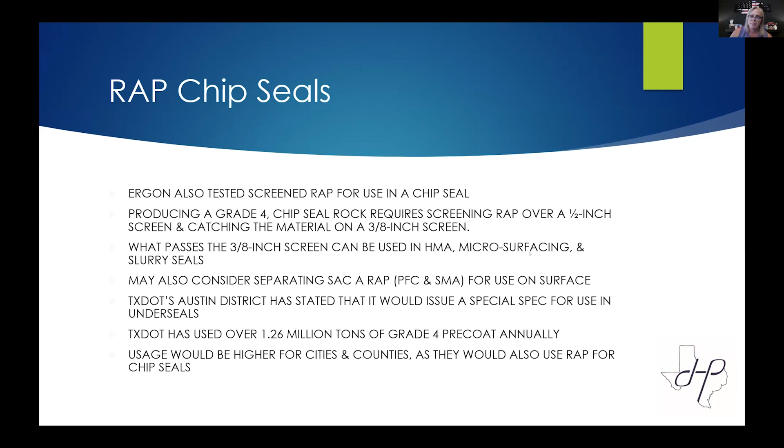But again, COVID and a lot of these things we were doing just kind of went away. As we talked about, some of the challenges we face are that RAP inventories are growing, and everybody's interested in sustainability. We're having to do these environmental product declarations and really make a huge effort to support the climate.

Our specifications really limit asphalt producers or material producers a lot of times. So when we look around at what we have available and look at your industry partners, a lot of what we were able to achieve we couldn't have done without the support from the technical folks at Ergon and Paragon. There was a lot of opportunity, a lot of potential.

Here in Texas, we have a lot of hot mix type B, which is a 1-inch material that they'll use and do 8 to 10 inches of, followed by the surface, whatever they're putting on top. Well, the bottom lift is usually exempt production, blade-laid exempt production, so they're not even going to really test it. So why put our higher quality aggregates in hot mix down at the bottom when we have plenty of other materials available that would do just as well, whether it's through a cold central plant or whatever.

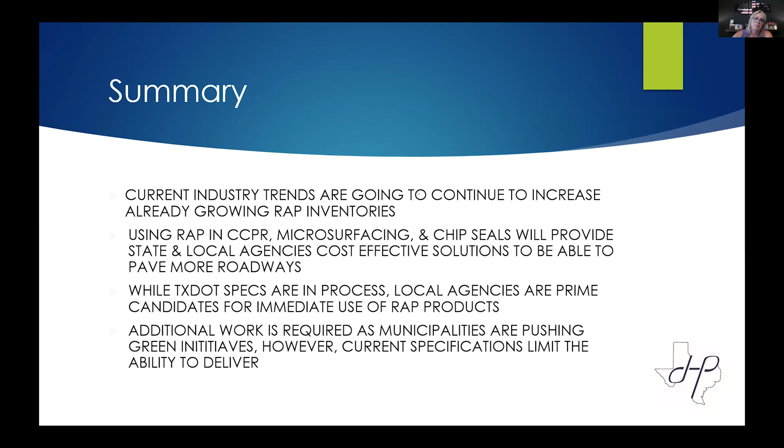I think just working with your local vendors, material suppliers, your local agencies and states, just making people aware of this kind of work that everybody's been doing, I think there's a lot of opportunity for all of us, kind of anywhere. But with that, that's all I got.

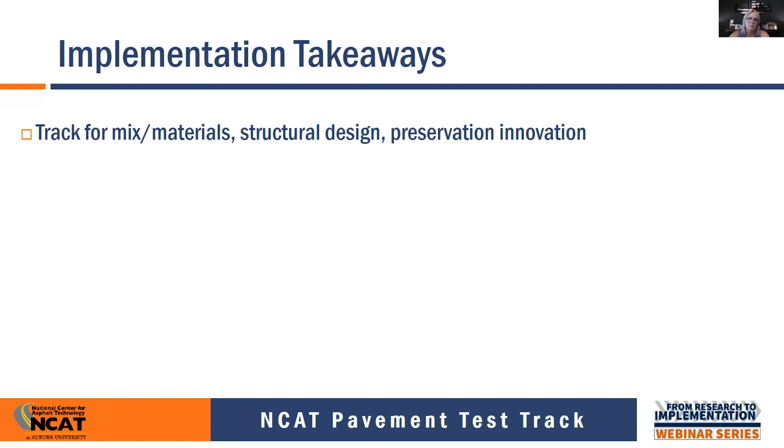Minutes here to pull everything together and emphasize some implementation takeaways on the subject we've been addressing today. First of all, the track is, I think you can see, a great place to do mix and materials research, structural pavement design, and also pavement preservation when you want to consider and vet innovation in agencies of all different sizes. Over the course of the past hour, we've talked about virgin mixes, low RAP mixes, high RAP mixes, cold recycle, coarse fractionated RAP chip seals, and fine fractionated RAP microsurfaces as options in ways that you can monetize any kind of excess RAP that you might have on your yard.

Fractionation is a processing, and fractionation can be a great investment. I know you have to have the space to do it. But when you can, you have fine fractionated RAP that has a really high binder content. You have coarse fractionated RAP that's kind of a black rock that makes a good chip, and you can also use it as a pre-coated aggregate as specifications allow in the gap graded mixes or the coarser graded mixes.

You really want to focus on monetizing this, on converting a liability in some cases to an asset. Even if you're not building and maintaining a perpetual pavement, you can use the principles of the three layers that Dave Newcomb kind of pioneered decades ago. You can apply those principles to all flexible pavement structures. You want a crack resistant bottom, stiffer middle layers, and a renewable surface. There's lots of options for that.

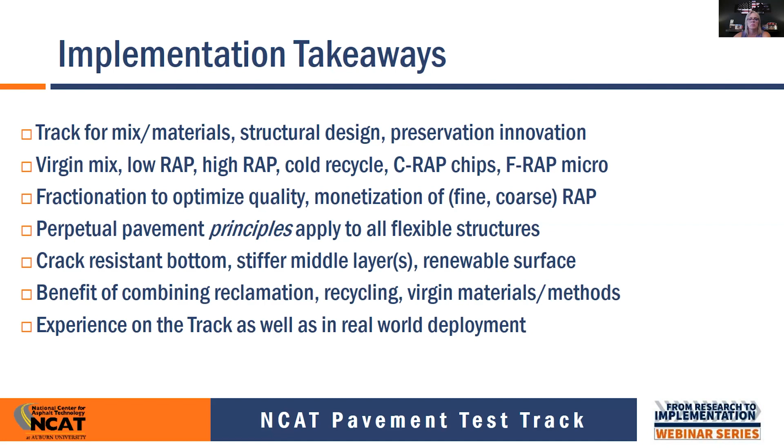All of this, as we like to say at the end of every webinar, is really all about safe and sustainable asphalt pavements at the lowest possible life cycle cost. We think this topic is a great way for you to do that.